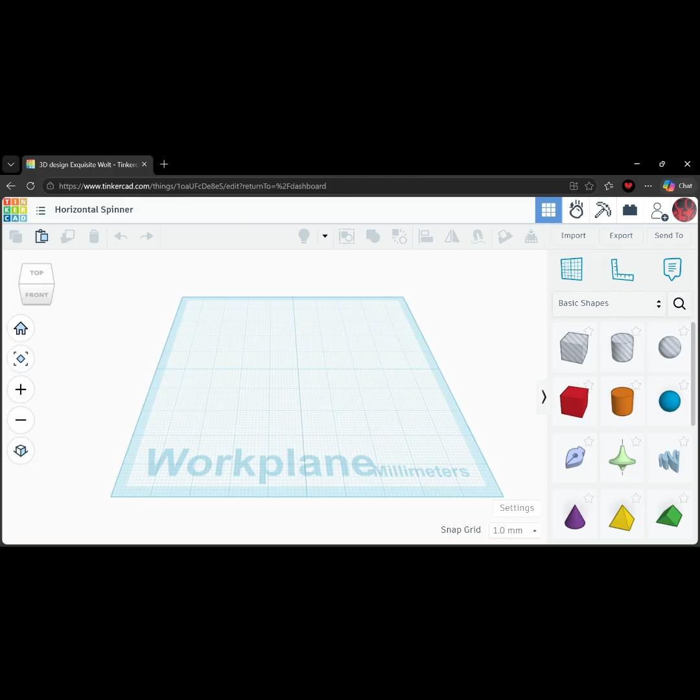So one of the things we're going to do is try to make this robot as symmetrical as possible. The more symmetrical we can make it, I believe the more stable our robot will be.

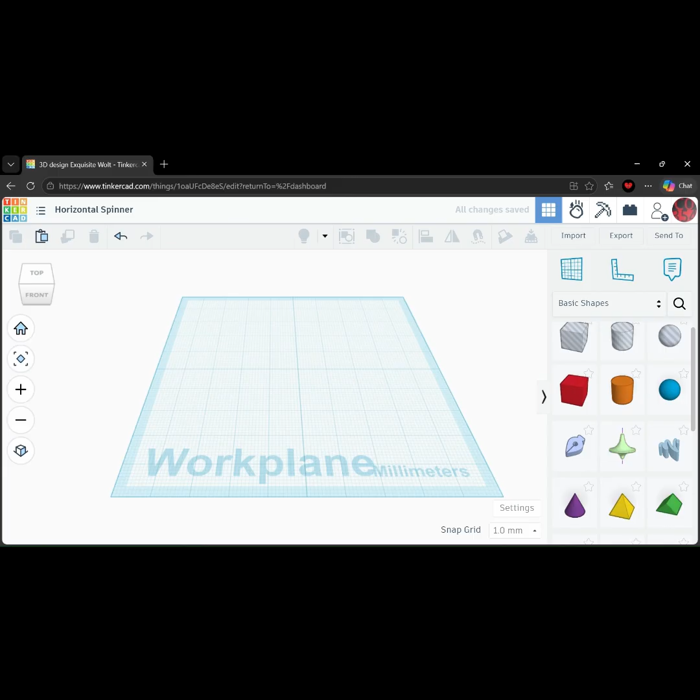So what we'll do is we're going to be taking... oh, you know what, let's take a pyramid.

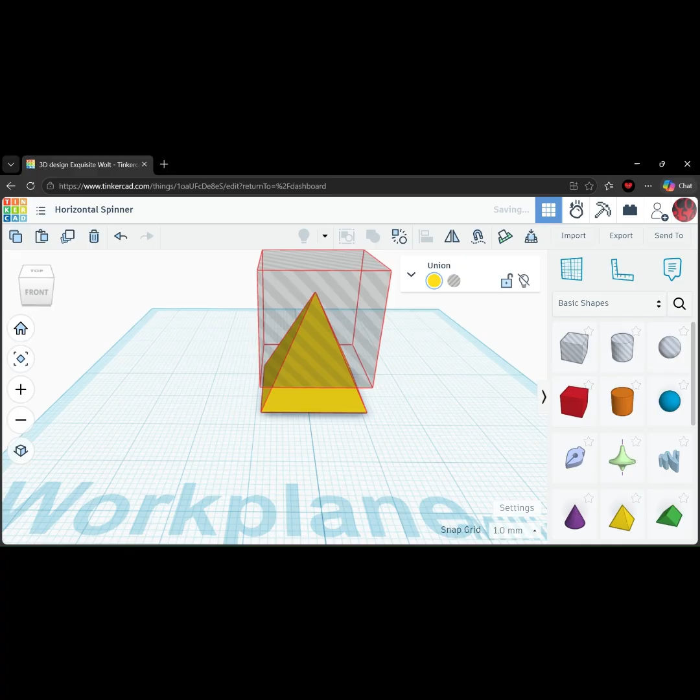And what we're going to do is take this and cut the top off. Alright, and that will be the base of our robot for the day.

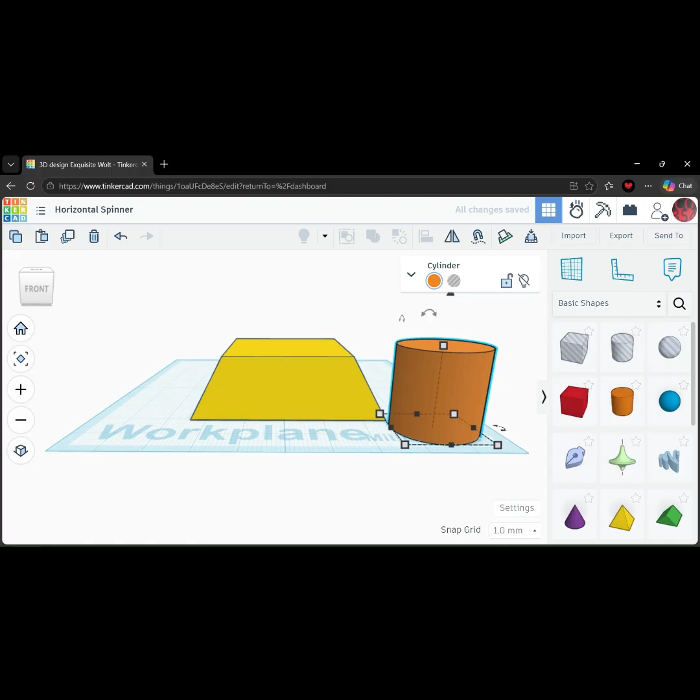What we're going to use, our cylinder - we'll be using cylinders here for the wheels. We'll just scale these down just a little bit. One there.

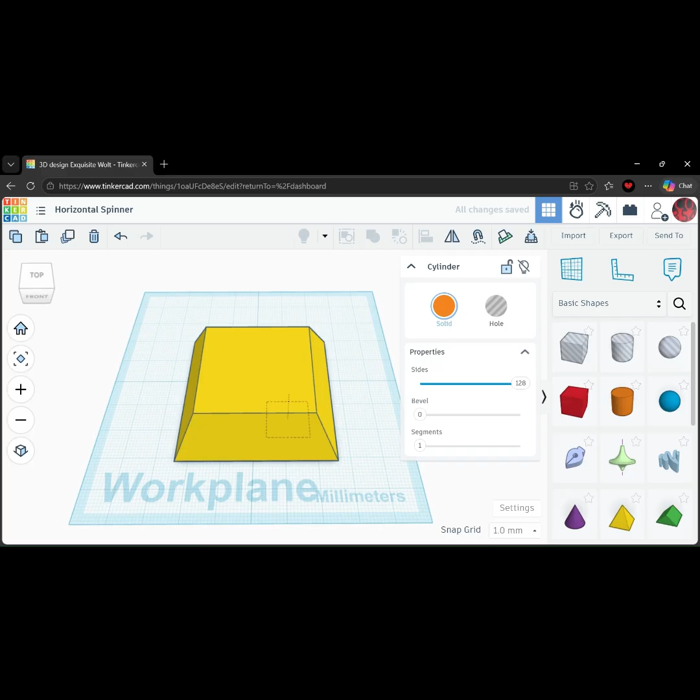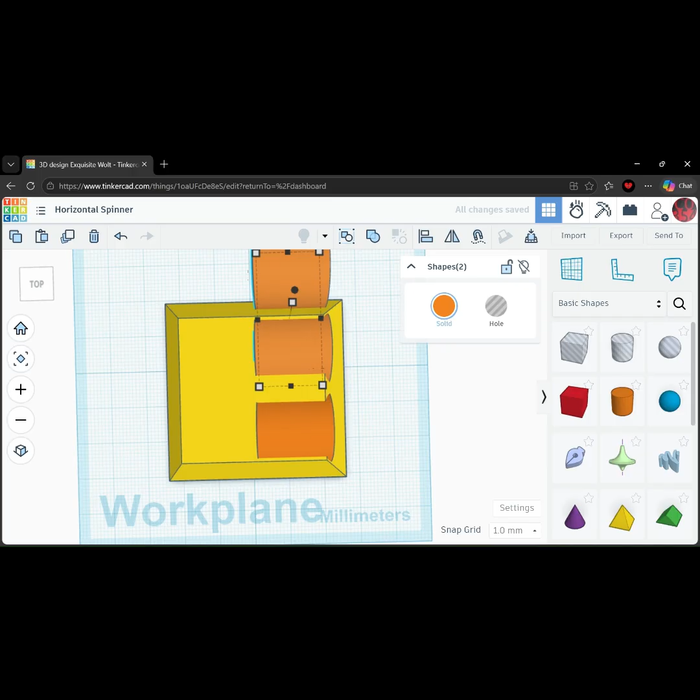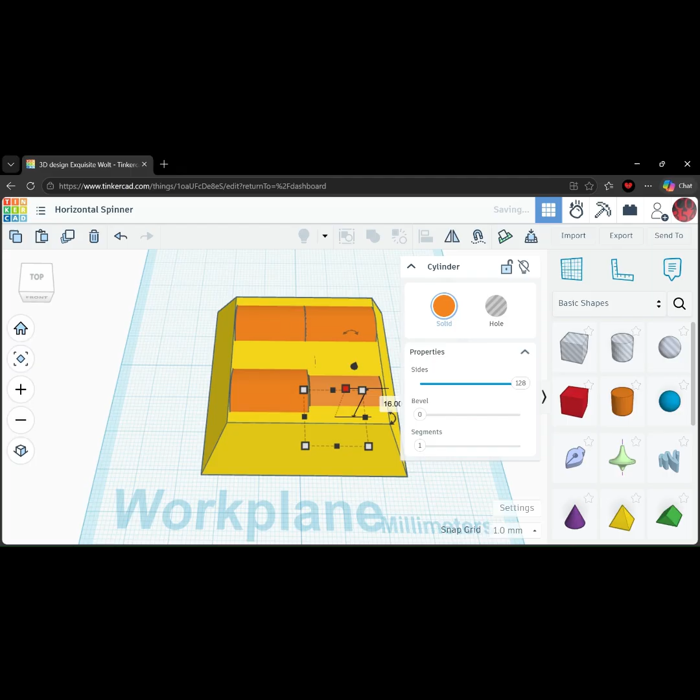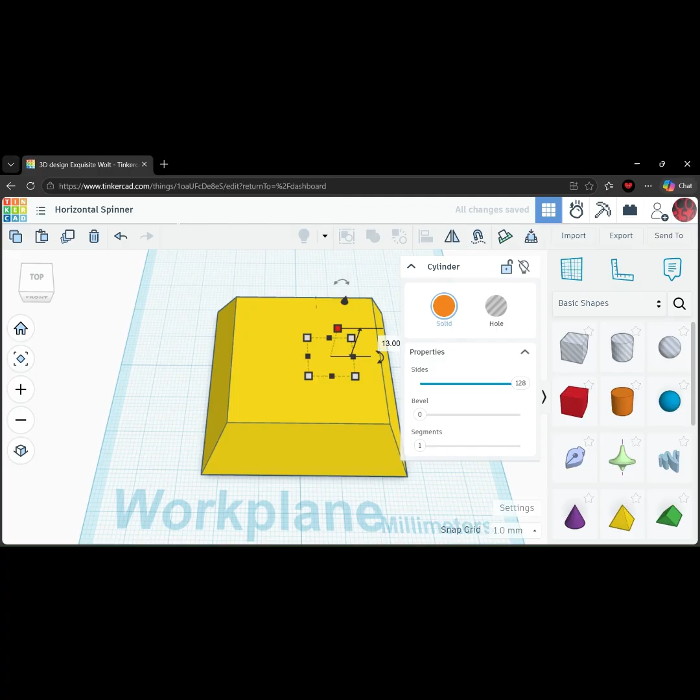Going to duplicate. Alright, we can line these up, and then size these down, 13 for each of these. So if we hit shift and grab the anchor, we can pull these down and uniformly scale them, making sure they stay in the right proportions while sizing them.

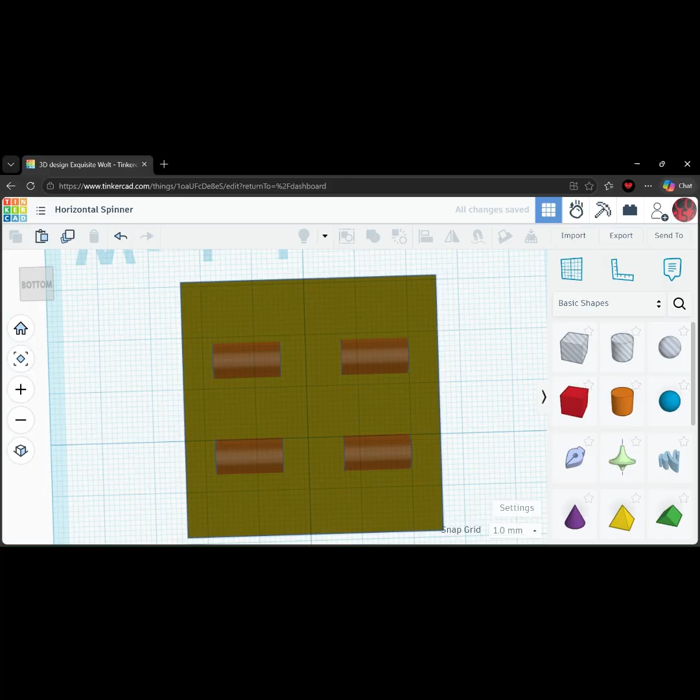Going to lift it up just 1 centimeter, and we're going to go underneath. We're going to scoot these over just a little bit, that way we got a nice wide base.

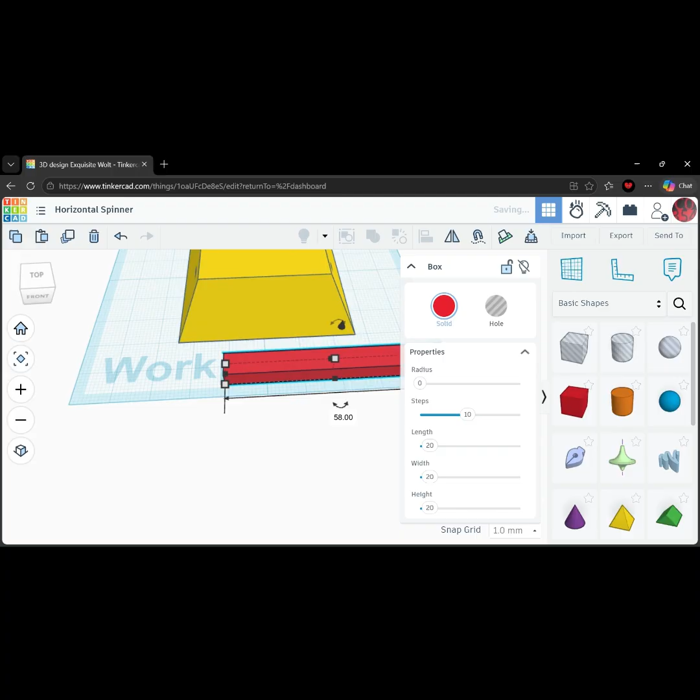Alright, now that we got that, it's time to make the weapon. So we're going to take the box out, and we're going to do it just like with the horizontal spinner - take it and make it nice and wide, and make this a bit flat. Just like that.

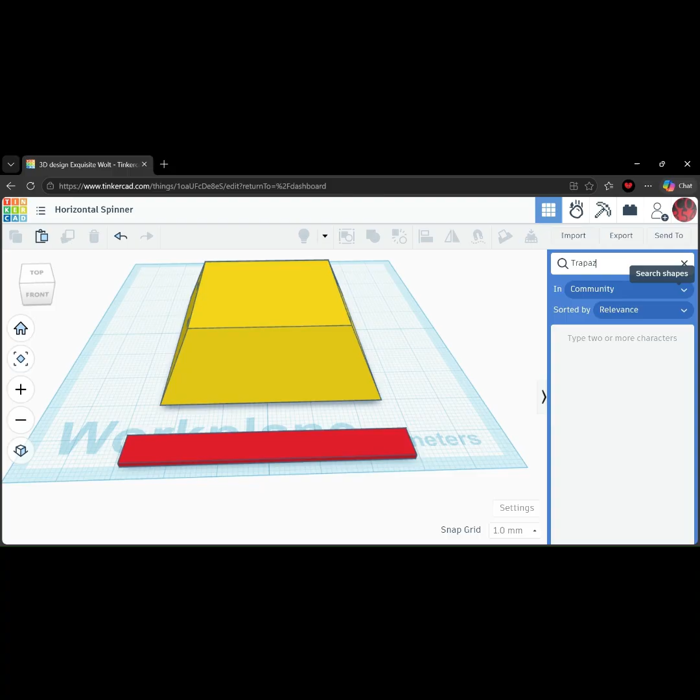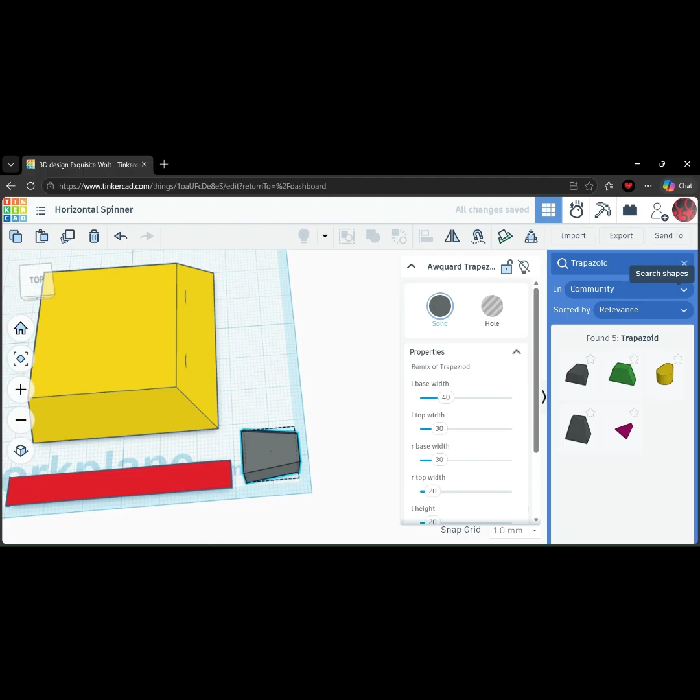And then for the edge of the weapon, we're going to search, and what I want to use is a trapezoid. Alright, then we got the awkward trapezoid here. We're going to align it - middle. Just like that.

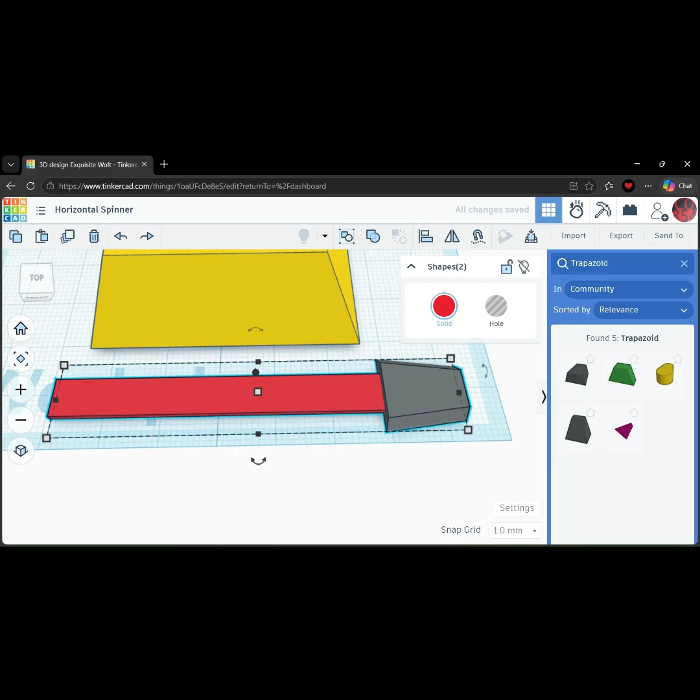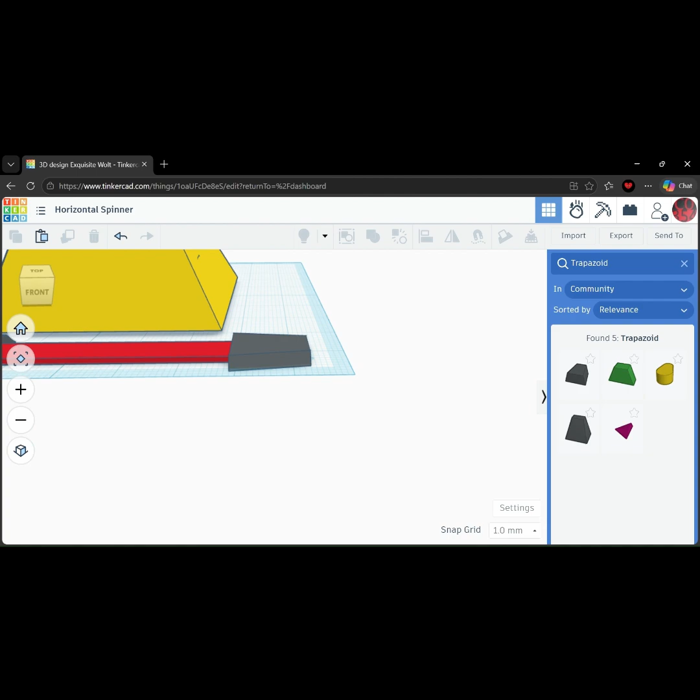Duplicate, rotate the bar, delete one of those bars. Alright, so that is our weapon for the day.

We're going to group it, and multicolor it so we know which shape is which. We're going to drag it to the top here.

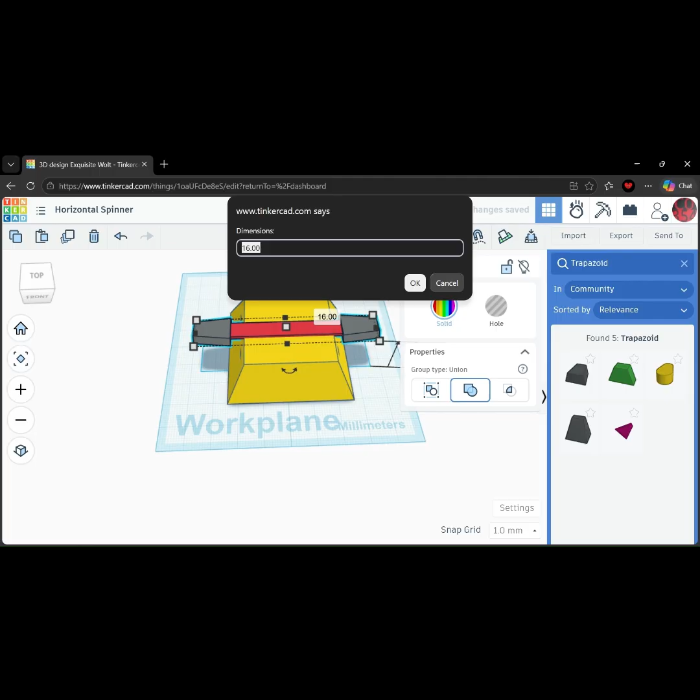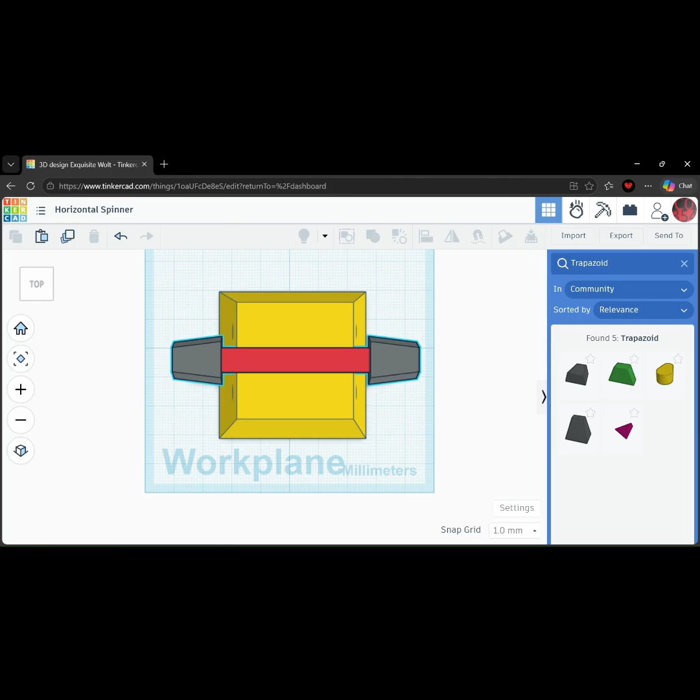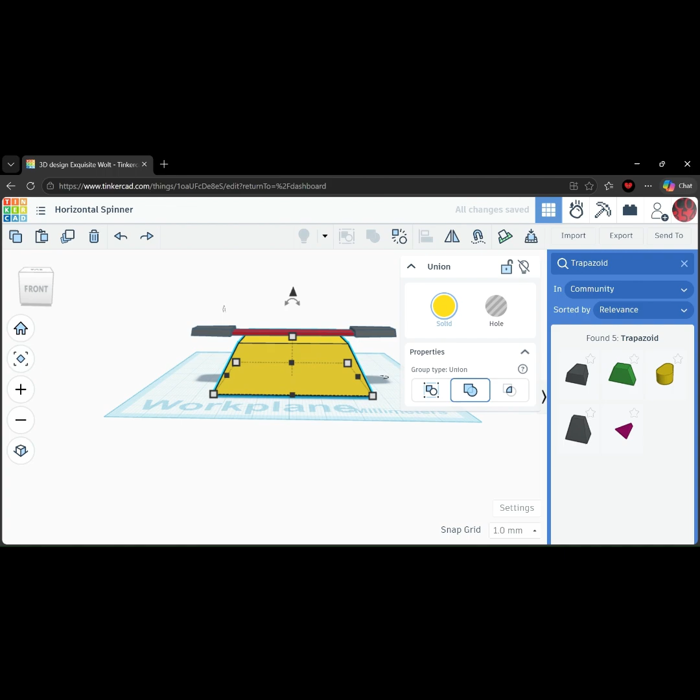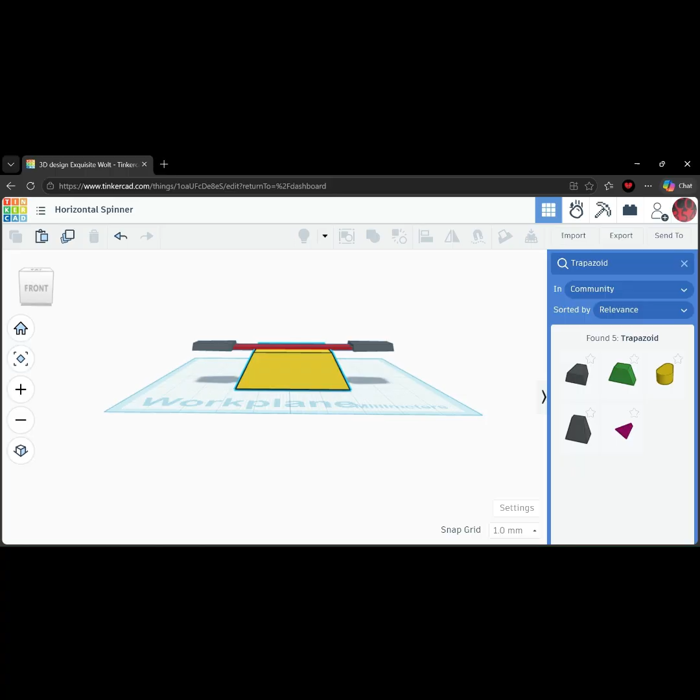To align this a bit. Alright. Then what we can do is probably just lower down the scale of the bot right there - want a bit more of a lower base, if you know what I mean. That's how we will start the bot off.

Right there, and what we're going to do is go to the sim lab so we can put some motor connectors on it and make sure we get moving the way we want it to.

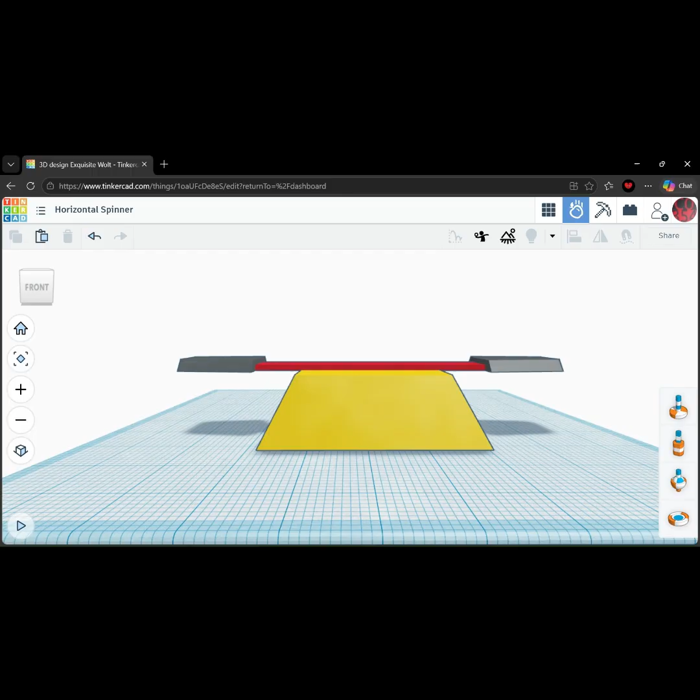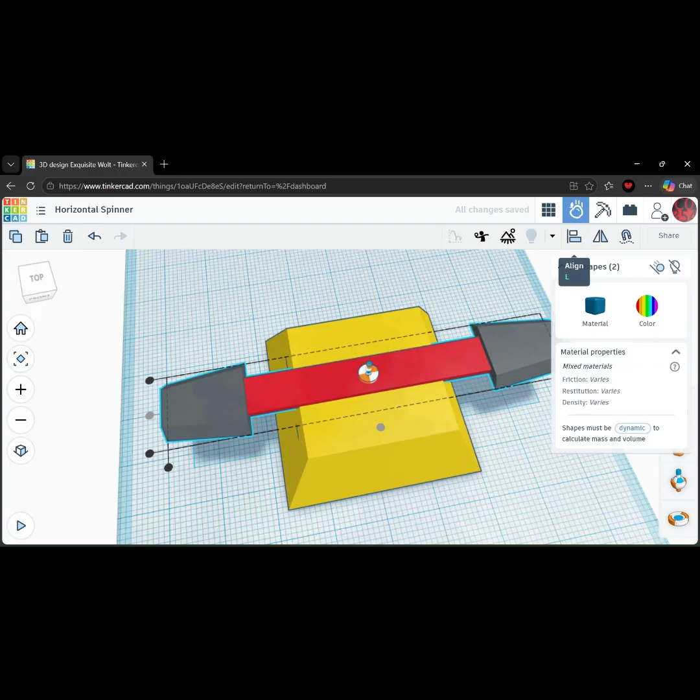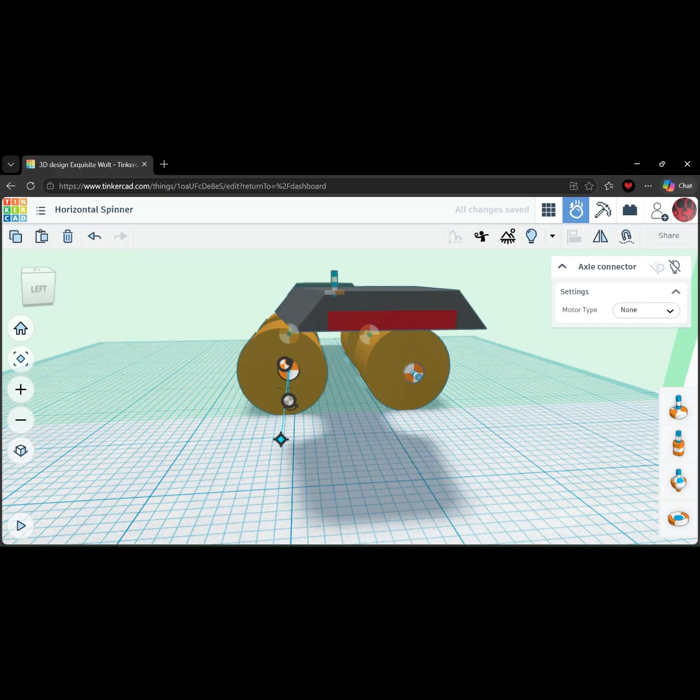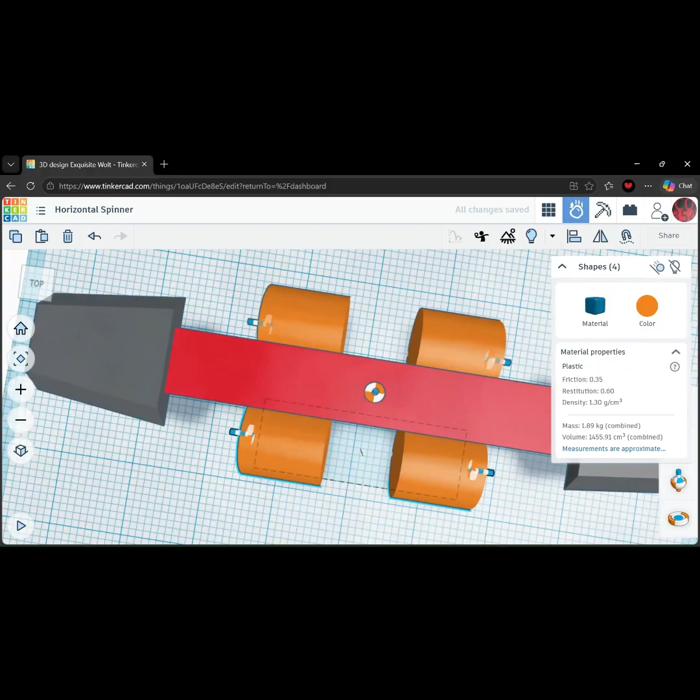I'm going to put that there. We're going to align it. If you don't know how to use the align tool, it is best that you learn how to, because it is very important, especially when adding connectors on things such as wheels and weapons. Okay, align that. Line, hit the middle. The more central you put everything, the better it will be.

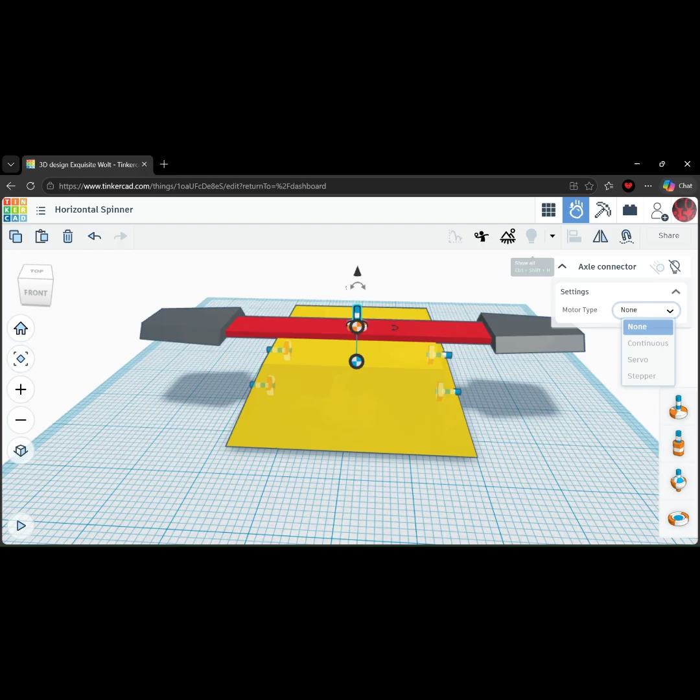Going to connect it there. Alright, we got continuous. Set the motor speed all the way up.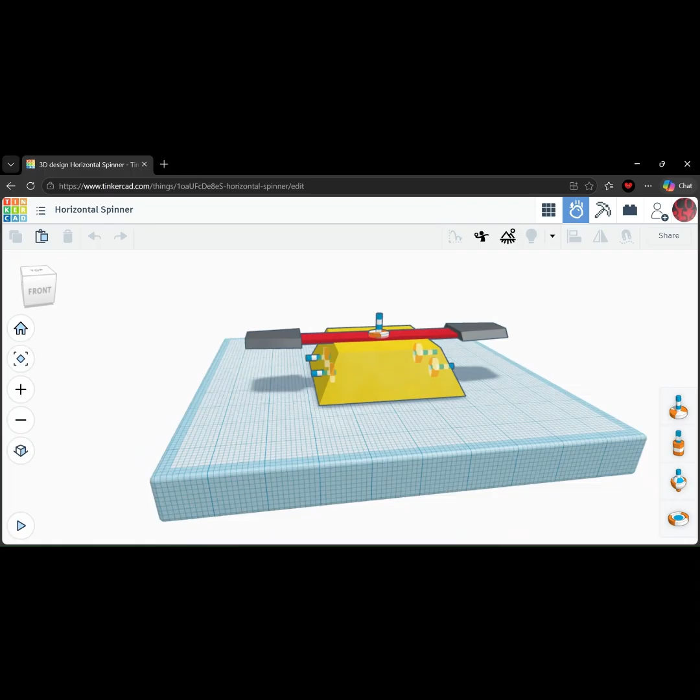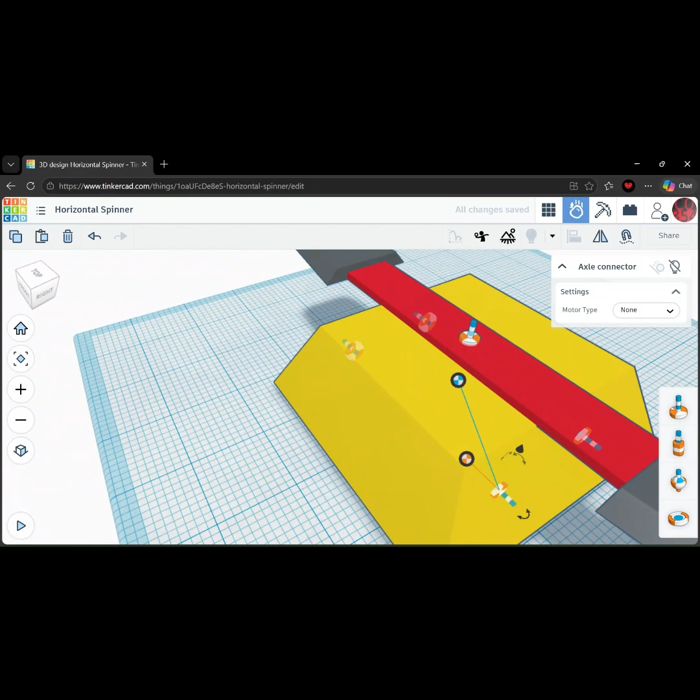Alright, now that I've got the weapon going, now we can get these wheels on the roll. Continuous - those going forward, and these going backwards.

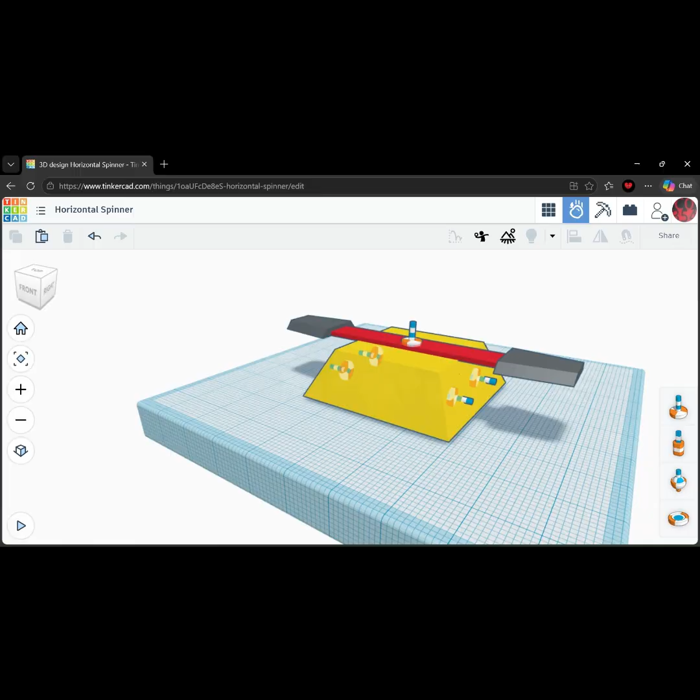Alright, so yes, it's going to be a little bit unstable, but that is usually how a lot of the horizontal bots are. But we are going to now spend some time making it look fancy, adding some stuff to it. In fact, I have a few ideas that might actually help improve the state of our spinner bot. So I'll catch you guys here in a minute.

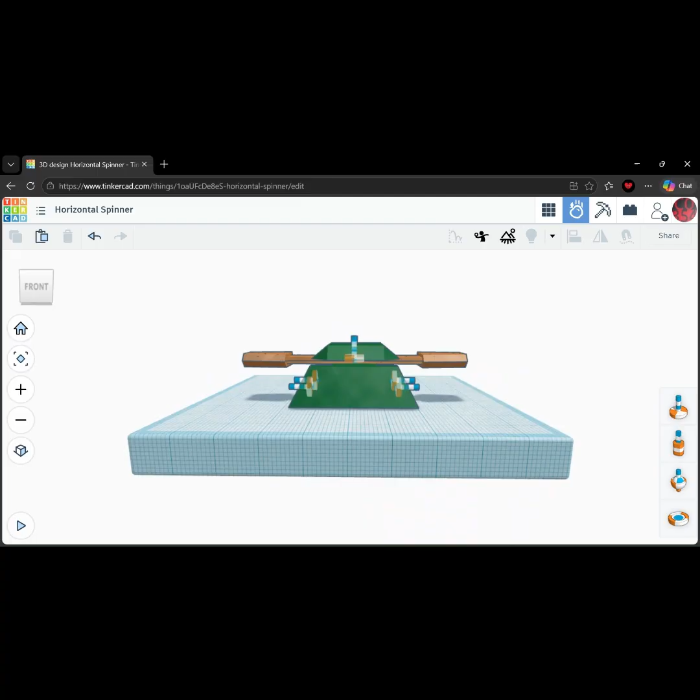Alright, so what I did with it is first of all I added a second bar, one that spins in the opposite direction, and that will kind of act as our counterbalance for the weapon. That way we're not spinning around, like how a helicopter has the big propeller and a small propeller on the tail to keep it from spinning around. That is what we did here. Of course, you can make it with just one horizontal spinner bar.

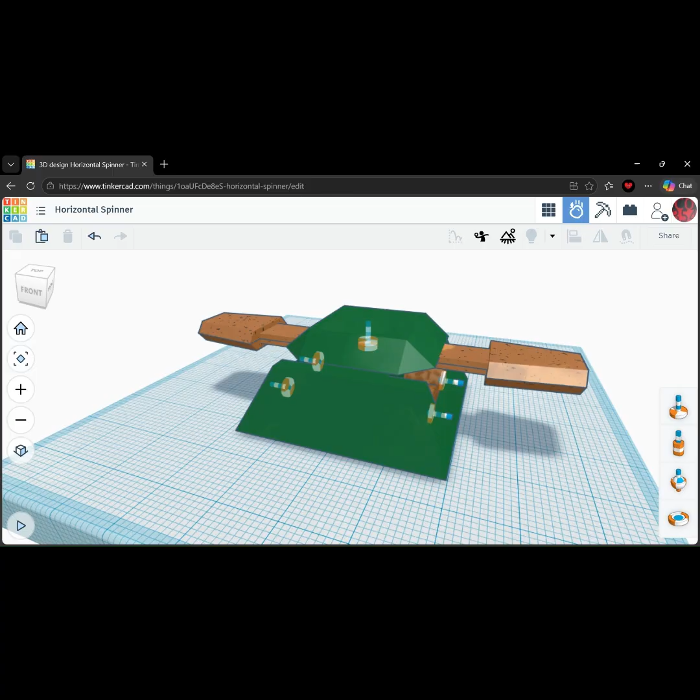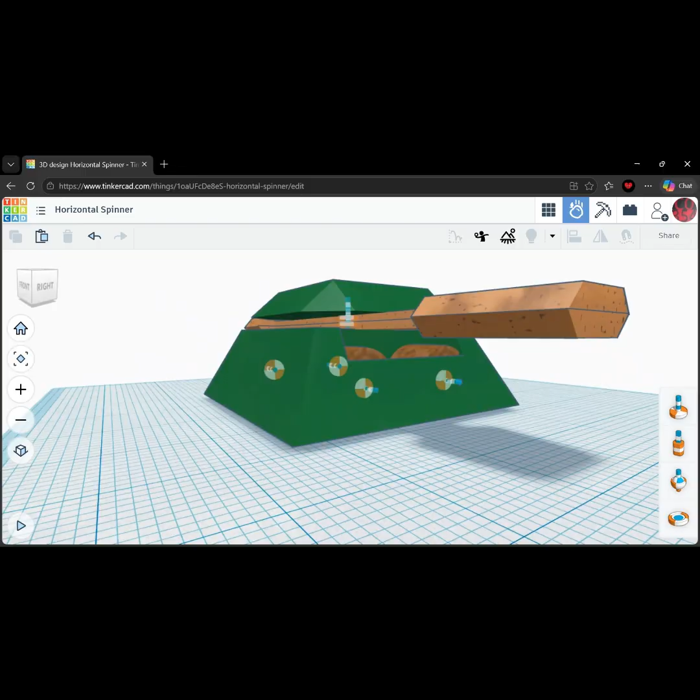And also, as you guys see, as the last final detail, we made the tires rubber for grip, and the way the rules are in the tournaments I have is body plastic and weapons metal.

Alright guys, so that is how you make a horizontal spinner bot. That is what a horizontal spinner bot is. I hope that answers your questions and helps improve your fighting career in Tinkercad Battlebots.